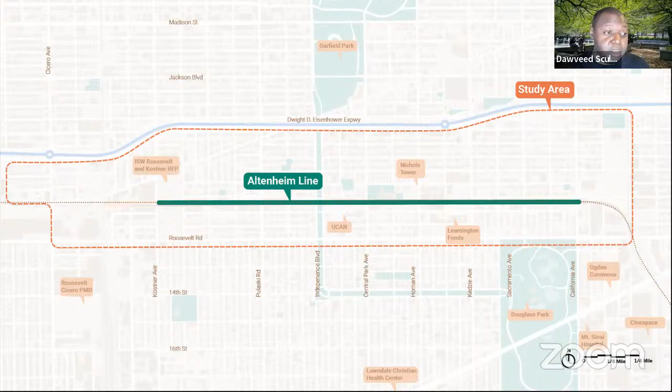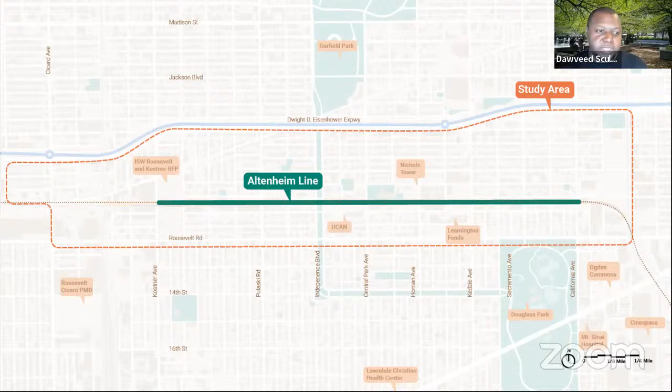Into the community process, to step back and give context if you're not familiar with the study so far: the study is for the Altenheim line, nicknamed the Lawndale line. The idea is this existing rail line that's very underutilized, and the opportunity to leverage it as a recreational amenity that connects through the community is key. We've been tasked with studying the line, but also a larger study area encompassing areas north and south of the line, as well as east and west, to understand the opportunity.

The goals for the project have been fourfold: exploring recreational opportunities around the line itself, identifying the highest and best use for industrial and commercial parcels, focusing on how that could be job generating, and building a sense of community ownership and control. We don't want this to be something that comes in from 50,000 feet, but something met from the ground up with the energy and input that's helping shape the ideas. Also supporting local economic growth, and developing strategies for equitable investment and anti-displacement, understanding that's a key priority we've heard from multiple folks.

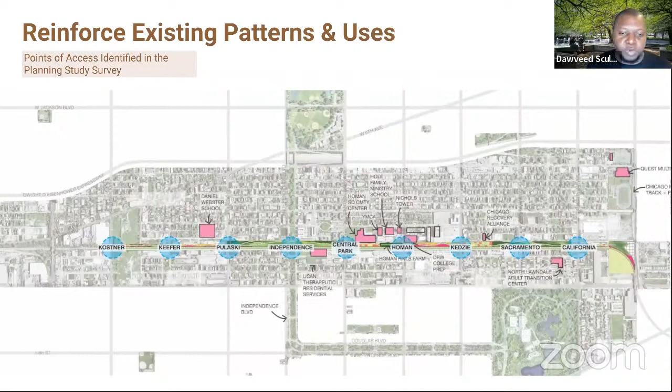We need to create a rhythm of access points. Right now they're every quarter mile, looking at opportunities to access the line and making sure it's accessible for all—a key idea of the landscape design.

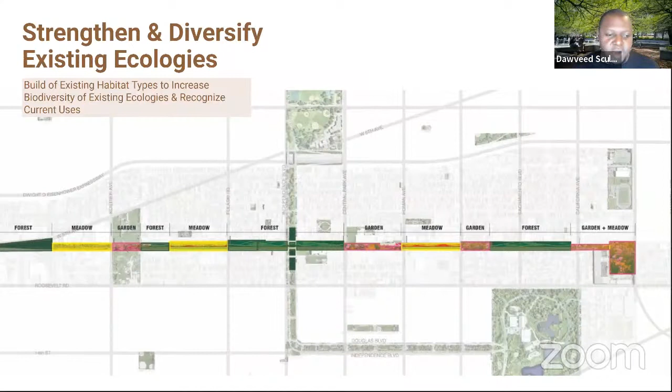There's an opportunity to really strengthen and diversify the ecologies and ecosystem that's already there. We don't want to bring in things that are foreign; we want to leverage the areas where the parcels expand and take advantage of that. You see this rhythm of meadow, garden, and forest, and all these ecologies allow for a variety of uses within each zone.

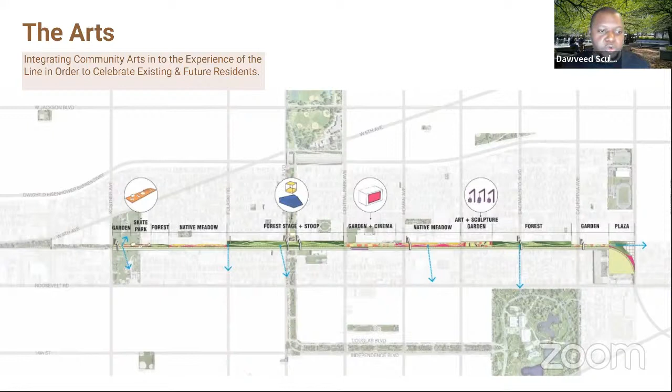And also understanding the opportunity for integrating arts and culture, not just murals, though that's a part of it, but also sculpture, performance arts, and music, understanding places where all of these things can live and happen along the line. One of the key ones, which we'll talk about in a second, is this idea of a forest stage that connects to the boulevard system.

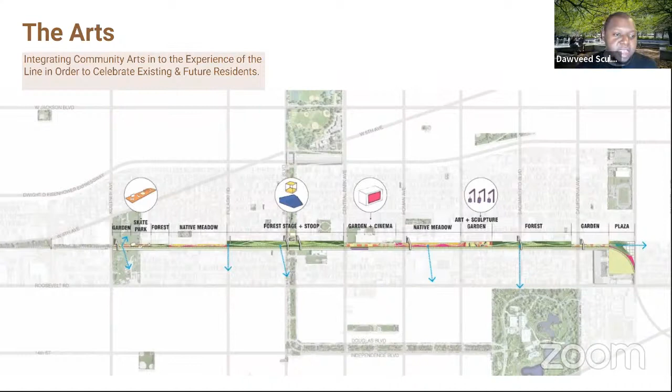So we started to look at these three scenarios, and want to zoom in on some areas and talk a little bit about what the line could be, understanding there's still a ton of design work that has to happen. These are initial ideas we heard in community interactions, and we really want to take a stab at how that could look.

So looking at this idea of a Parkway Theater that connects along Independence, communal arts and culture connecting to Homan, and then the Civic Green, which would allow for both views back downtown and take advantage of nearby adjacencies around public, community active spaces.

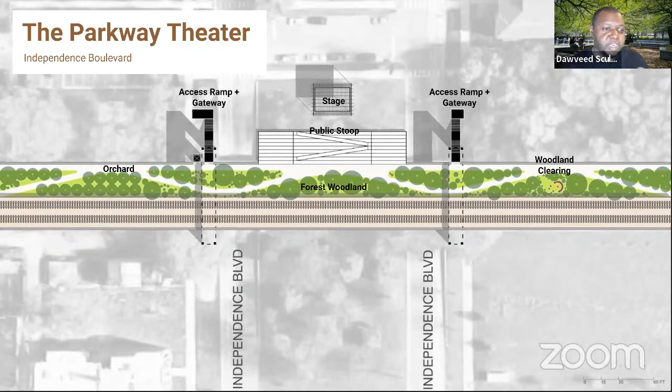Starting with this idea of a Parkway Theater, there's an opportunity to take advantage of the beauty of the historic underpass condition that connects to Independence Boulevard and the boulevard itself, leveraging that space for a public stoop and a stage for performance within this woodland, orchard-like field of trees that would bring life into the space.

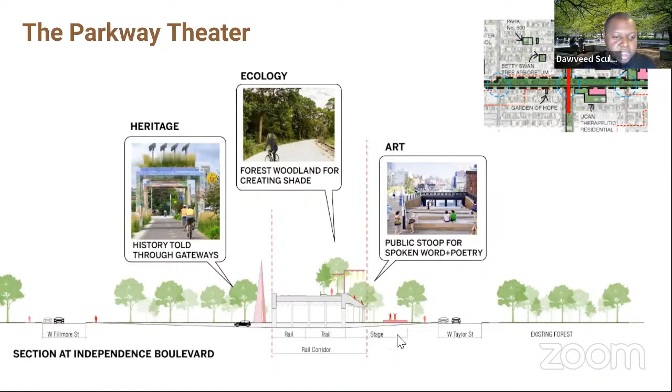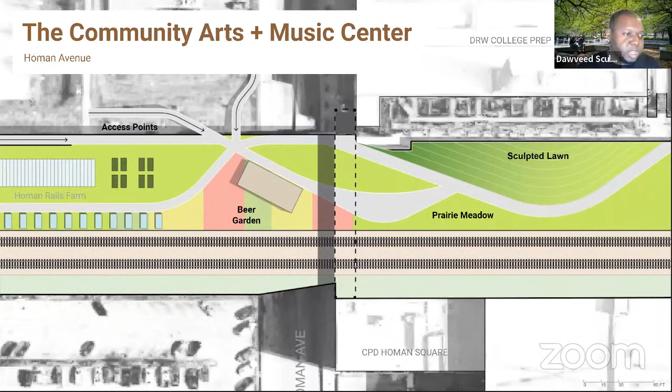Shifting a little to the east to Homan, there's a real opportunity to build off the momentum of Homan Rails Farm, as well as DRW College Prep, and build in key elements: finding opportunities for easy access, this idea of sculpted lawns, as well as integrating solar and active energy generation onto those spaces, as well as performance.

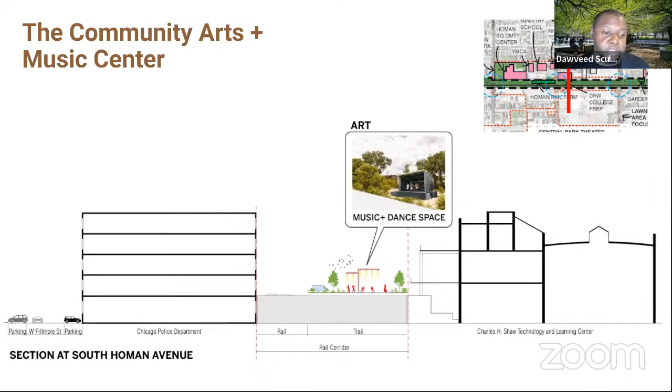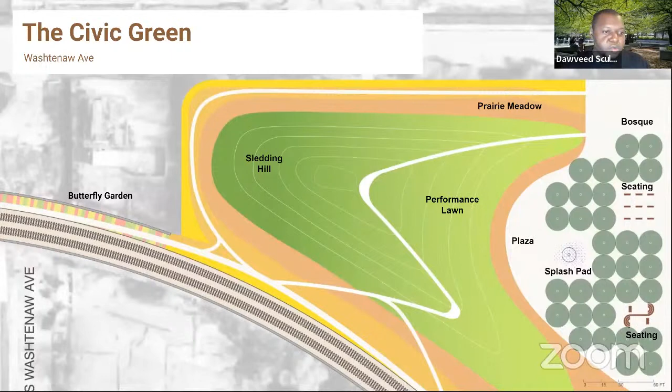And then finally looking at this idea of a Civic Green, and the opportunity to really build topography to allow for things like a sledding hill, performance lawn, splash pads, and other elements that would really be a great ending to the line.

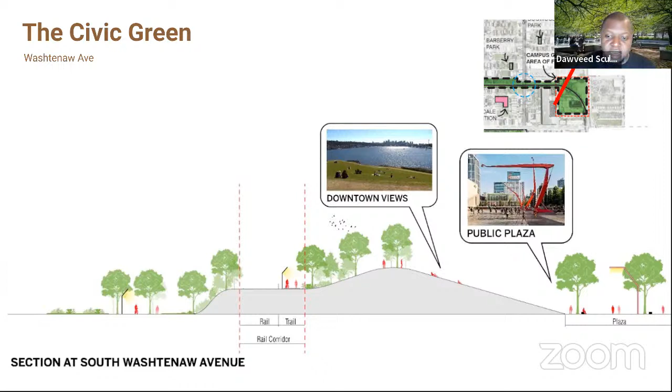Leveraging that topography to really build the land up to get these amazing downtown views - you can see them today, but getting up a bit more would provide an opportunity to do that in a grand way, and integrating arts and recreation into that space as well.

So all of those are just examples of how these key elements and key places are being thought of as key nodes along the trail.

But there's also a series of development focus areas that we've been working with in tandem, in that they all come together to create a framework for both open space as well as the investment and development around housing, jobs, and a holistic vision for what the study area could be.

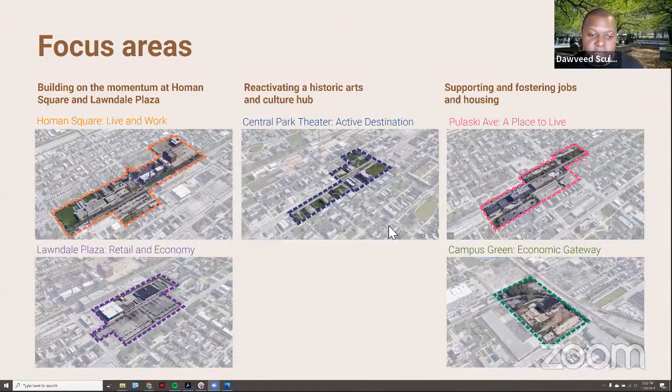So with that, I'll hand it over to Katherine Darnstadt of Latent Design. Thank you, Dawveed. Hi, everyone. I'm Katherine Darnstadt with Latent Design.

We've been working, looking at how do we couple these development opportunities that are adjacent to the rail that have strategic importance, as Dawveed mentioned, and also how do we build on existing community priorities and initiatives that are happening, and think about that through a lens of near term, meaning one through five years, long term, and then overall, longer even than a decade out.

And so with that, we want to focus on and talk through these five areas. It'll be a lot of information, and we'll pause partway through to answer some questions. Please feel free to drop questions in the chat, and I'll try and answer them as I'm going through.

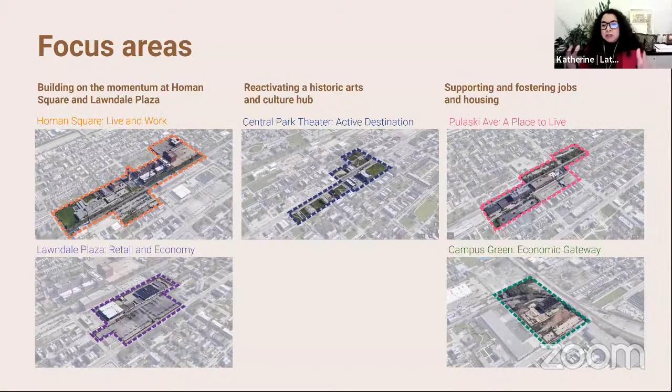But we'll start with the momentum. Let's build on the momentum at Homan Square and Lawndale Plaza. And if you go to the next slide, we could start to talk about Homan Square.

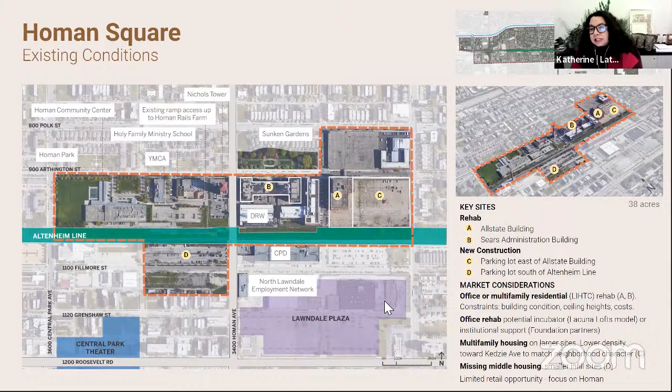If you go to the next slide, we start to think about what's the vision for this particular focus area. And we want to think about it as supporting more residential and more retail, mostly more residential and some new retail spaces, knowing that more retail will be happening at Lawndale Plaza and the adjacent Central Park focus area in terms of proposals that we are recommending.

We are thinking about adaptive reuse of the Allstate building, and then also thinking about the future as this line becomes an amenity and more people are coming to use it. We see that there will be a need for both parking for these new facilities and then parking for people who are using the line. So thinking about how we could reuse the existing parking structure as both a rehabbed element, but also potentially considering the top floor as a community solar rooftop project. And really, can we start to think of a variety of large, horizontal spaces, parking lots, roofs, things like that as part of a larger community solar project that could exist adjacent to the rail itself.

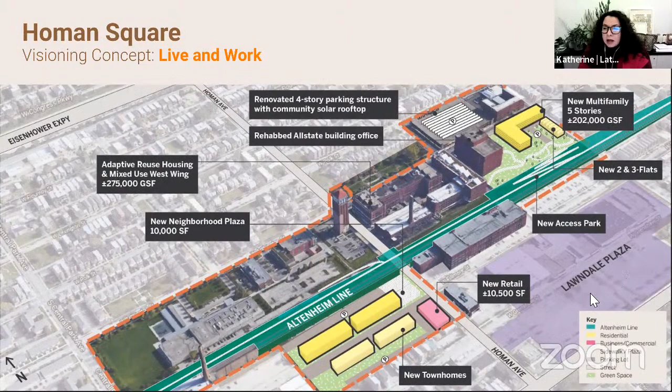So on the north side of the rail, we're looking at some more dense structures. You see in the upper right, the yellow L shape - we'll focus on that as an opportunity site. So in this focus area, that becomes the first area that we would look at for potential new development. But we really want to focus on bringing forward rehab development to Allstate, to the administrative building and elsewhere in this area.

And then if you go to the next slide, we looked at a lot of great examples that are already existing across the city, looking at diverse housing opportunities at different scales. In the Homan Square focus area, we have both multi-story residential, four and five stories, but then also we're thinking about townhomes, two and three story residential townhomes as part of that housing stock.

We're thinking about trail access points and accessibility, multimodal use, how much width and space there can be for multiple bikes, people, and activities to happen. We're thinking about how that trail access looks both on the north side and the south side of the trail, to be able to grab people from both sides of the neighborhood.

We're also looking at great examples of adaptive reuse structures for both office and job creation, but also for housing opportunities. The top one is an example of an old warehouse that became office space, and we have tons of great examples of that across Chicago. The bottom is an example of how we might reface or reskin an existing parking structure so it becomes more attractive and integrated into the neighborhood.

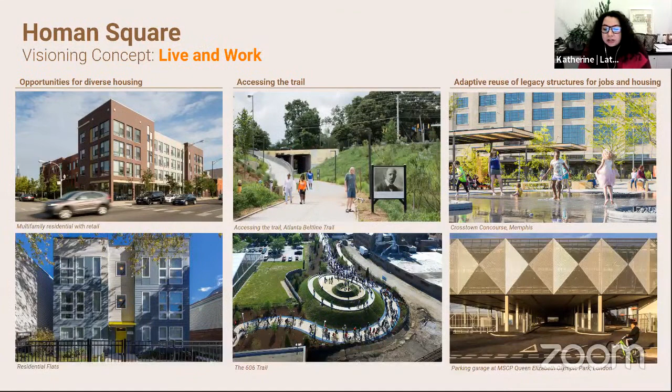This is what we're starting to envision. This is a very early massing diagram thinking about what we have currently. The view on the left is the current view, looking west on Arthington, roughly a little past Kedzie. You see the Allstate building in the background, the existing parking lot on the left, and the parking garage on the right.

On the right-hand side, you see a new image of what it could start to feel like on that streetscape. That same view could potentially have a new multi-story residential building—maybe 4 or 5 stories—thinking about residential at a larger scale because there's already higher density happening at that intersection. We're also looking at how that garage could be refaced and reskinned for a more attractive front, integrating community solar on the rooftop.

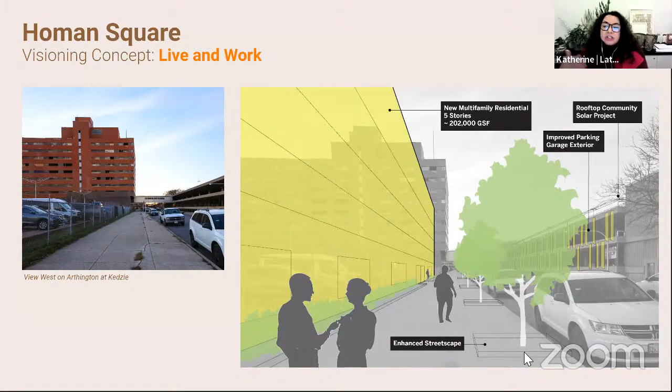Also, what you'll see repeatedly throughout these slides and focus areas is a need for enhanced streetscape, wider sidewalks, bump-outs for traffic calming, and more landscape and greenery. You'll see that throughout as a recommendation we're moving forward with.

That closes out Homan Square, and now we want to move on to just adjacent to the existing Lawndale Plaza. This encompasses all of Lawndale Plaza as it currently exists as a shopping mall. We're seeing two main opportunities: one is rehab opportunities, adaptive reuse, and new programming in the vacant Cineplex theater; the other is adding more density or micro retail or small-scale retail to the parking lot to provide more frontage on both Homan and Roosevelt Road.

That came out of direct conversations we were hearing from North Lawndale Employment Network and Steans Family Foundation about their goals of bringing more Black-owned businesses and supporting more entrepreneurship in the neighborhood. So we're thinking about building more spaces—both retail and office—for those individuals to be able to open up and grow in.

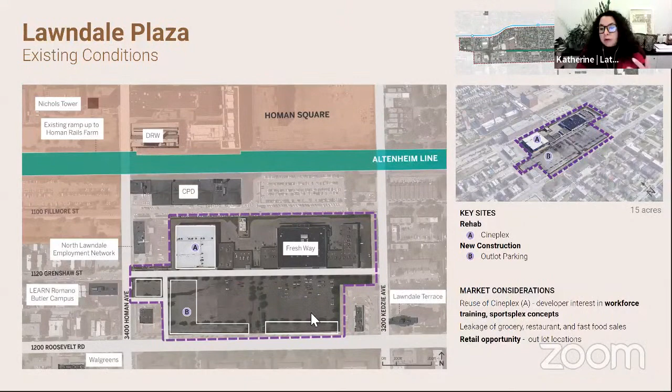This is what we start to see in terms of the massing and scale, building from left to right. We want to build on the new outdoor plaza that North Lawndale Employment Network just created in their rehabbed bank building, bringing that outdoor space across the street to a new retail development with smaller individual buildings in the parking lot. That wraps around to provide new retail frontage on Roosevelt, with an expanded landscape buffer to enhance the walking experience along the street.

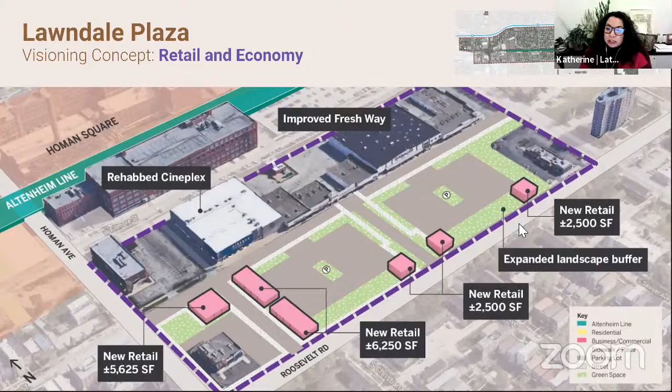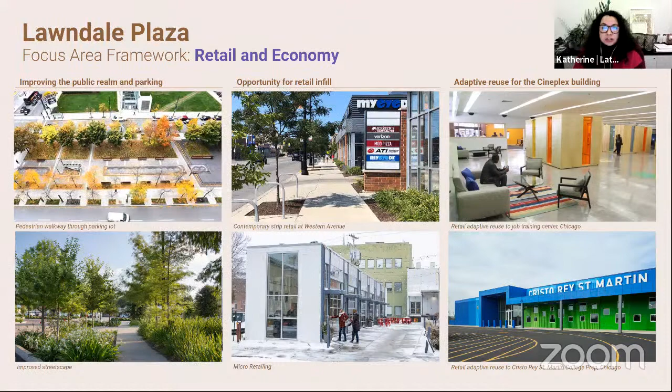Again, we have great examples of how we could create promenades or enhanced landscape areas that let people pass through, bring additional shade and comfort, and also provide opportunities for well-designed retail infill at a smaller square footage so there are more tenant opportunities available. On the far right column, we're looking at adaptive reuse examples for the Cineplex building—including a job training center on the South Side, and the Cristo Rey example, a big box retail space turned into a high school here in Chicago.

Starting to look at the existing photo on the left of the parking lot looking north on Homan towards the employment network. Thinking about the image on the right, what does this new retail look and feel like? How can you walk down a new kind of streetscape and have businesses along it within the parking lot, but not block any views. As a business owner, you'll be visible from the main corridors, but as a pedestrian, you'll be able to circulate through.

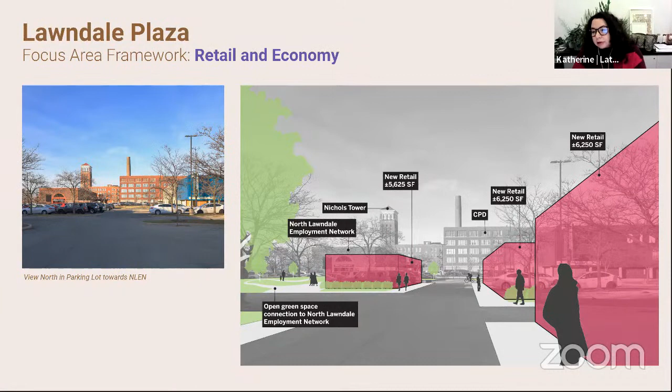I saw some comments about bringing more programming to the rail. That's a great suggestion that we'll look into, but it's also about what is appropriate programming that can attract people off the rail and have those adjacencies be complementary to each other. All right, next slide.

So those were the first two areas we're looking at. Those become priority areas for building on momentum, and we would see those as early activation pushes for proposals or development. I want to pause here and ask: do these focus areas and visions align with the community aspirations, and are they still tracking with what you've previously shared with us in community meetings?

Are there additional elements we should offer? Feel free to drop that in the chat or raise your hand if you want to comment before we move on to the next three sites.

Thanks so much, Katherine. Yeah, that was an excellent presentation on those two focus areas.

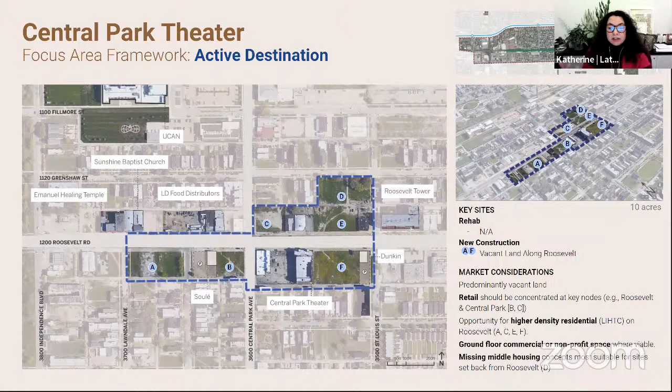Moving forward, we want to look at Central Park Theater. This particular focus area is at Central Park and Roosevelt, and is really anchored as an active destination and a cultural destination anchored by the future renovation of the Central Park Theater. We do see quite a few opportunities to reclaim vacant land with future development — it looks like we have 6 parcels that are vacant right around this area. And if you go to the next slide, this is what started to drive this particular area as new housing, and also mixed use and some micro retail, thinking about various areas and new commercial. So you have a lot of potential future development happening as part of our recommendation, along the Central Park focus area.

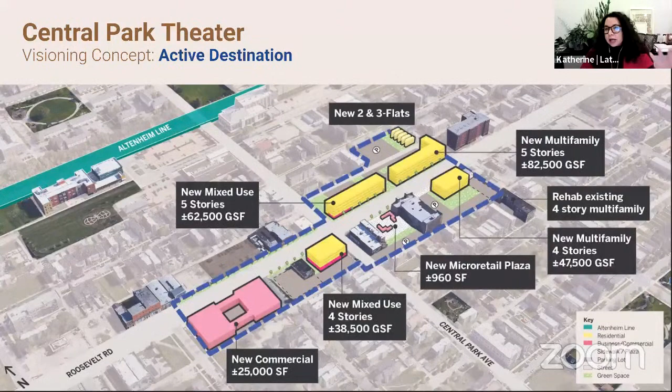We're also looking at opportunities between Central Park Theater and the church property itself, how they could enhance their property and think about their parking lot also as an opportunity for more micro businesses that could support theater functions and events. So really thinking about spot and transient uses that might support an event space.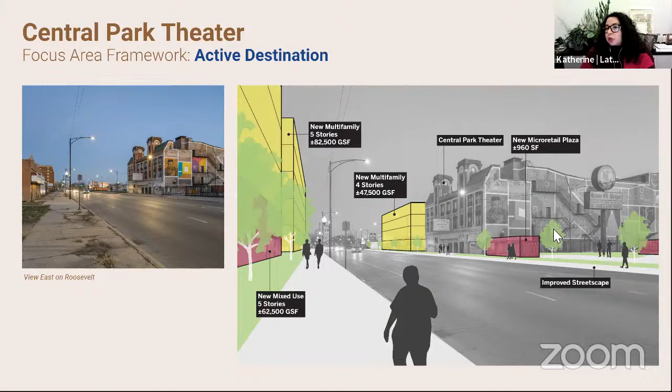And then on the right-hand side of that image, the micro retail that could exist on the Central Park Theater property and parking lot.

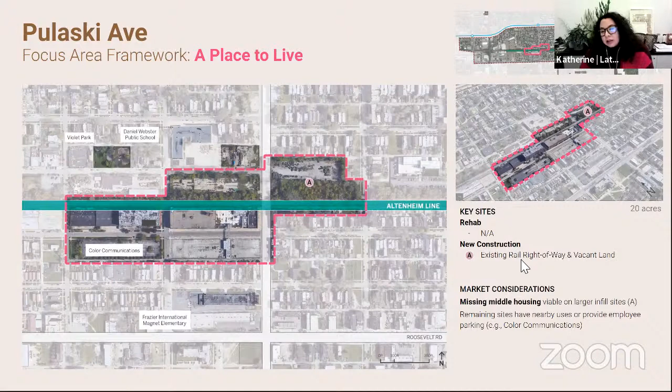So the next area we want to look at is Pulaski. We're moving further west, and here we're still focused on missing middle housing, so still residential, but want to scale down a little and look at housing on the north side of the line, and another access point or access park on the north side, taking advantage of the large section of vacant lots titled A, and then looking at improvements on the south side of the line, which are currently the Color Communications property and their associated parking lots.

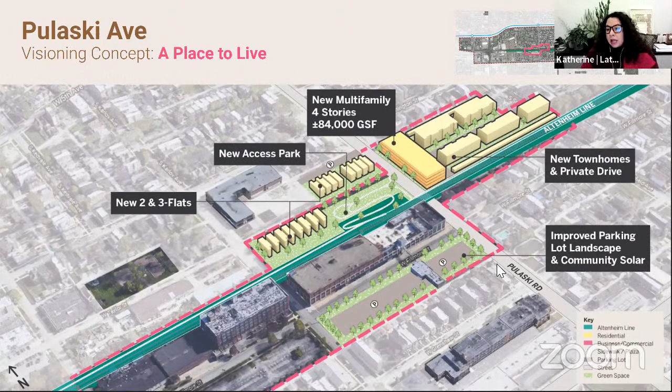So on the enhanced north side of the line, you're able to bring different scales of housing, looking at both 2 and 3 flats, and then townhomes, and also multifamily residential along Pulaski itself. We have a great variety of housing opportunities that could fit in those northern parcels, taking advantage of not only the adjacent school but a proposed new access line to the rail itself. So this becomes an amazing amenity, that whole area at Pulaski and the Altenheim line.

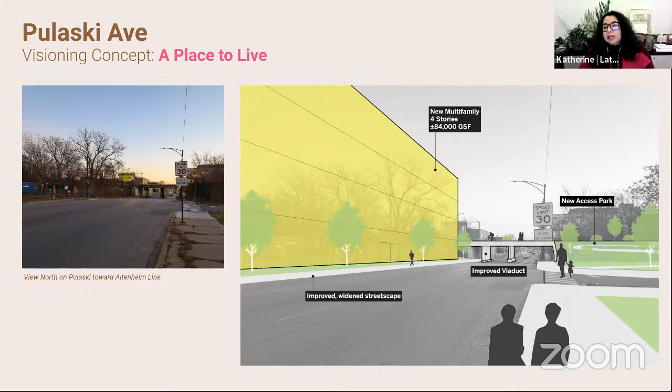Next, this starts to think about Pulaski, going from this access park on the right-hand side, to the line, and then walking past a new multi-story residential building - whether it's 4 stories or 3 stories, we'll think about that scale - knowing you're elevating and ramping up to the line itself. So this also helps create a transition area from at-grade to the elevated line, and also becomes a new accessible access point.

And then finally, a couple comments came in about residential being part of a component that complements the future Roosevelt Kostner INVEST South/West site, so hopefully that decision will be shared soon. But that also anchors this idea of the western edge of the trail becoming an economic hub, and the eastern end around this campus green and the Hope Academy site can also become an economic hub and a gateway and access point to the trail.

Currently where this ends is a trail. This trail actually narrows and then turns to join the existing Metra and CSX line, so it joins an active rail. We really want to look at being able to terminate the accessible part of the trail down into a new access park, and really build on some of the great energy and development that Hope Academy has done north of the rail itself.

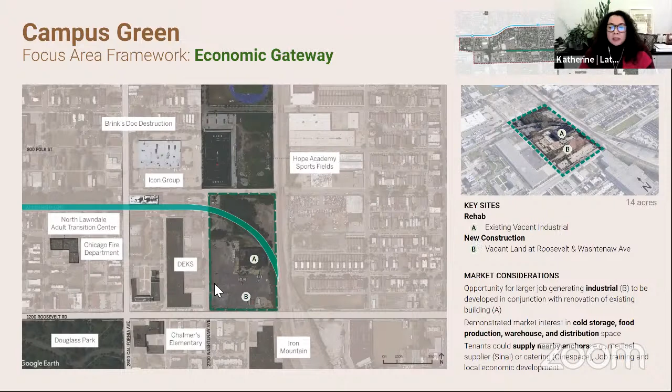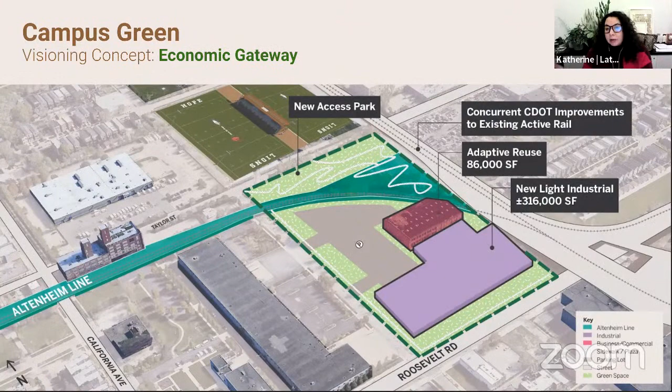On the south side of the rail, we're looking at rehabbing that existing structure, which is about 86,000 square feet, and looking for a use for that. We're also looking at the possibility of new light industrial adjacent to that building, complementing it and the adjacent vacant lots, since there are a variety of existing light industrial or office warehouse spaces around this section of the line. We felt this could be a great complement, and also a great jobs hub, an employment opportunity depending on the employer that comes there.

If I go sledding, I have a sled - that might be hard for you to get there on a bike in the snow, so you might be driving for that particular activity. We want to think through to make sure that space is provided and available for all the different ways that people are going to come and activate and use this rail.

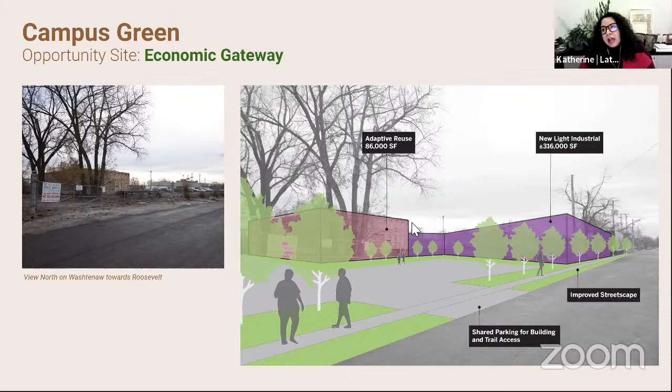So again, we'll go to the next slide and pause here for some additional comments and questions about those three areas that we just shared - the focus areas of Central Park, Pulaski, and Campus Green.